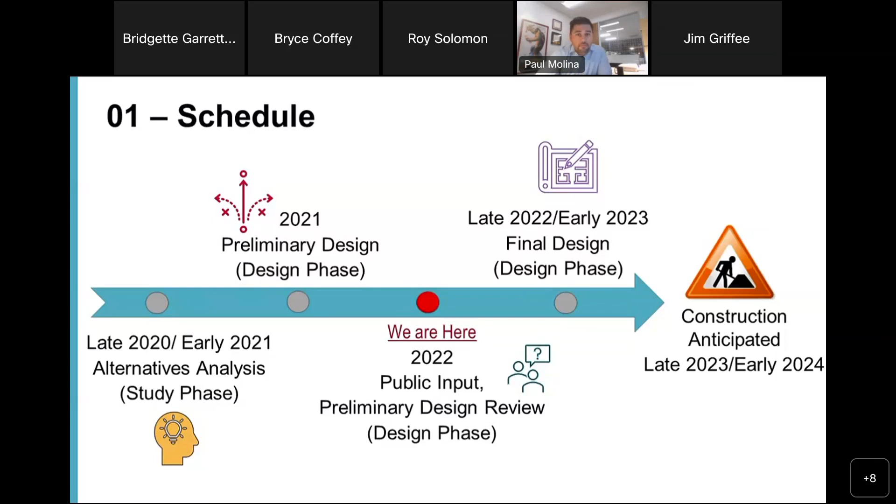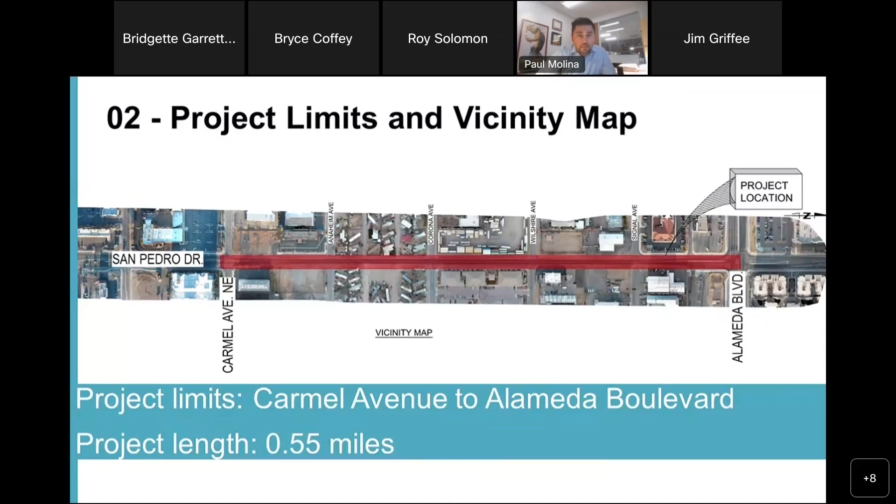So the overall project description and the corridor improvements that we're proposing for this project include full depth roadway reconstruction, new sidewalk, reconstruction of existing curb ramps and drive pads, modification to the existing storm drain infrastructure, as well as new storm drain infrastructure, new lighting, ADA, and PROWAG improvements.

We also did several considerations for pedestrian and bicyclist access improvements. These improvements include ADA PROWAG compliant sidewalk, drive pads, and curb ramps. Improvements also included buffered bike lanes where feasible, as well as bike lanes throughout the corridor, new lighting, signing and striping for both pedestrians and bicyclists.

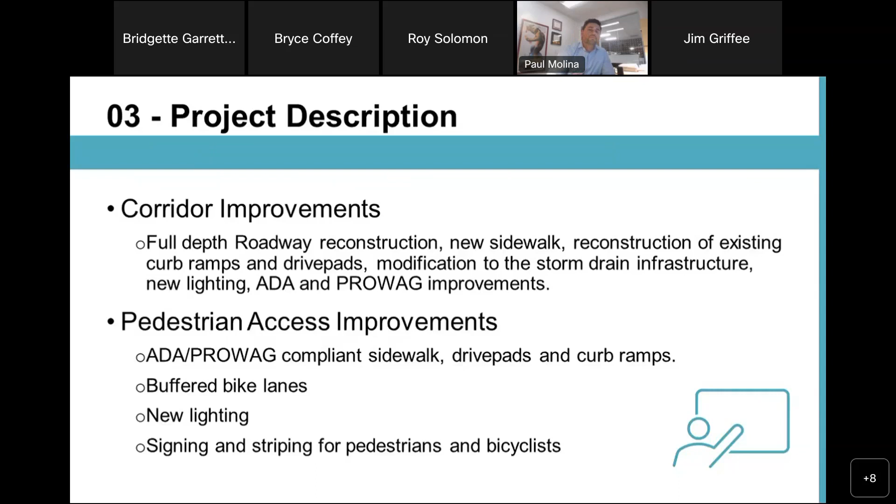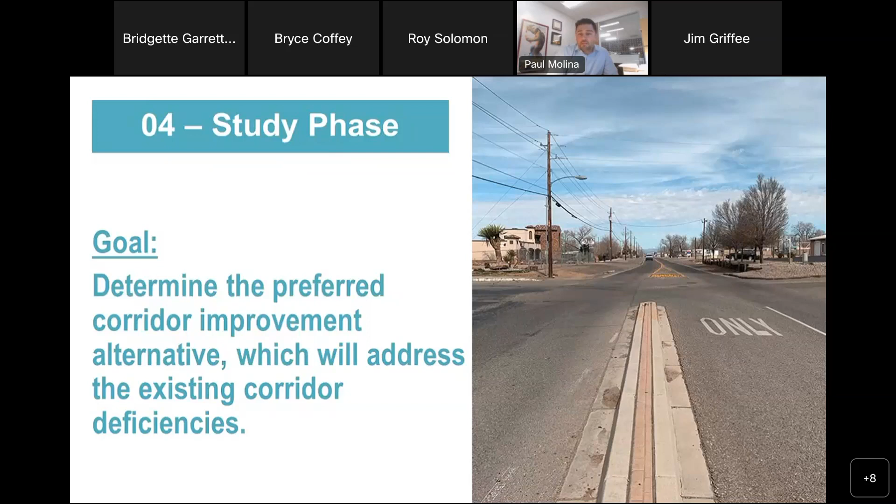So as I previously mentioned, this project went through a study phase late 2020 and through the beginning of this year. The goal of the study phase was to determine a preferred corridor improvement alternative, which addresses the existing corridor deficiencies. This includes deficiencies for both the transit, vehicular, and pedestrian and bicyclist use of the corridor.

So the primary deficiencies identified during the study phase were primarily the following. The existing San Pedro Drive corridor deficiencies include multimodal safety concerns, those being bicyclists using the roadway that vehicles are using, pedestrians traveling through the roadway, etc. There was non-compliant ADA and PROWAG infrastructure throughout the corridor as well.

There are a few small swaths of sidewalk out there right now. Many of those swaths of sidewalk are not ADA PROWAG compliant. Additionally, there are a lot of areas that don't have any sidewalk at all, so pedestrians are forced to use the roadway or walk through unpaved areas in order to get from A to B. The current layout has no bike lanes, and as I mentioned, had drainage deficiencies.

There is existing drainage infrastructure through part of the corridor, however, not through the entire segment. So we are improving the existing drainage infrastructure where feasible, as well as adding some new drainage infrastructure throughout. As I mentioned before, there's also some lighting deficiencies as well.

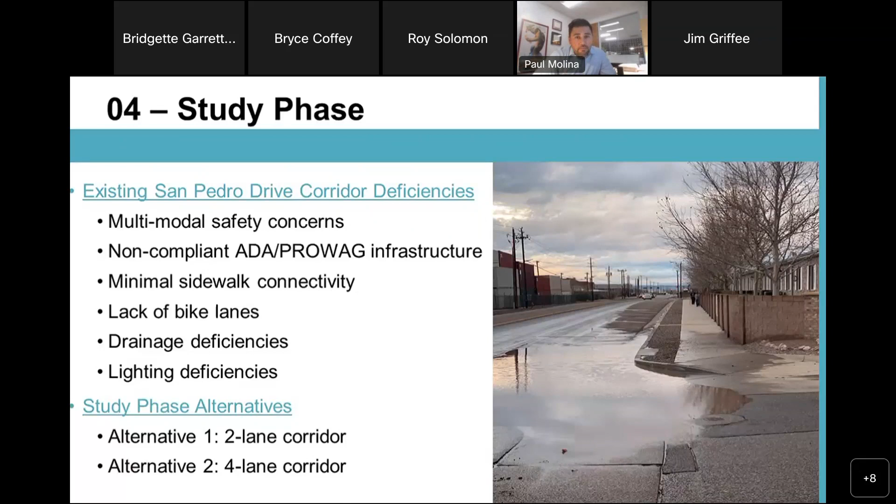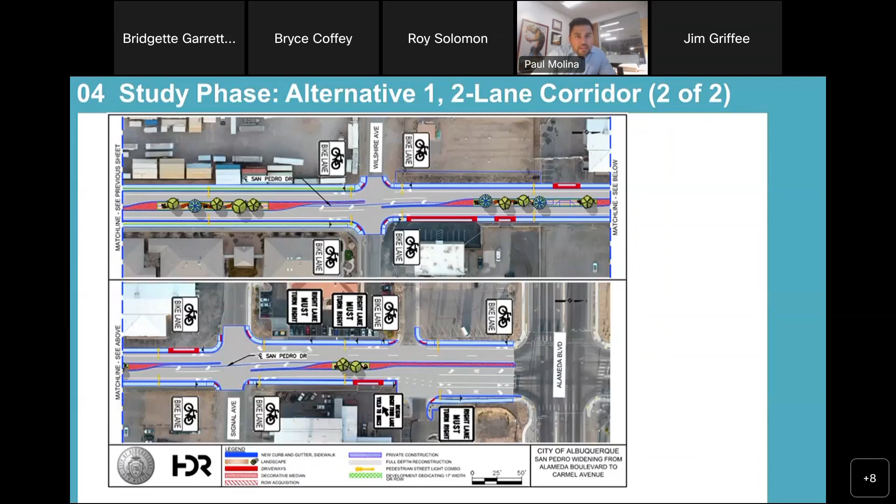Next couple of slides are going to be the 4-lane corridor. As I mentioned, the 4-lane corridor actually provides 2 lanes in each direction for a combined total of 4 lanes. In lieu of a raised median due to space limitations, a 2-way left turn is provided through the center. Like the 2-lane alternative, this one starts at Carmel Avenue, spans north, and travels to Alameda Boulevard.

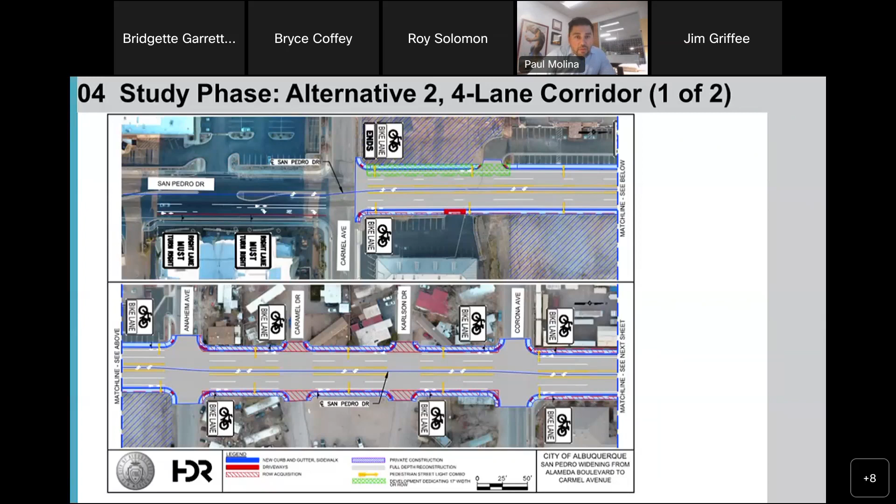Now I'm going to quickly run through a summary of what the study phase results yielded. For alternative 1, the 2-lane corridor, there were various pros. First of all, it was a smaller footprint. It required less right-of-way or less acquisition of property outside of the city right-of-way. We also did a traffic analysis during that time, and the 2-lane corridor showed a significant crash reduction when compared to the 4-lane corridor due to the raised median, which separated traffic from northbound and southbound.

The alternative 1, 2-lane corridor also provided less demand on storm drain systems - that being there not being as much asphalt or pavement surface draining to the storm drain system. Due to not having additional vehicular traffic lanes, it provides space for some bike lanes, some of which include bike lane buffers. It also provides space for some future landscaping, and overall, alternative one, the 2-lane corridor, had a lower overall cost.

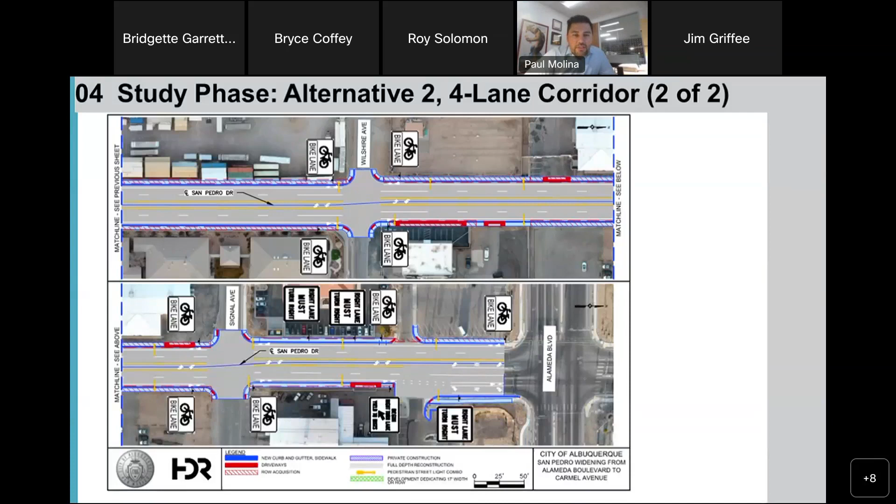I'm going to back up just one slide right here. You can see these shaded red, or hashed red, areas are actually the area for the sidewalk, which would require an actual right-of-way acquisition. In other words, we would have to extend outside the existing footprint in order to make this happen. There was a smaller crash reduction, that being because there is no raised median going through there, and then there's increased demand on storm drain systems and no room for bike lane buffers.

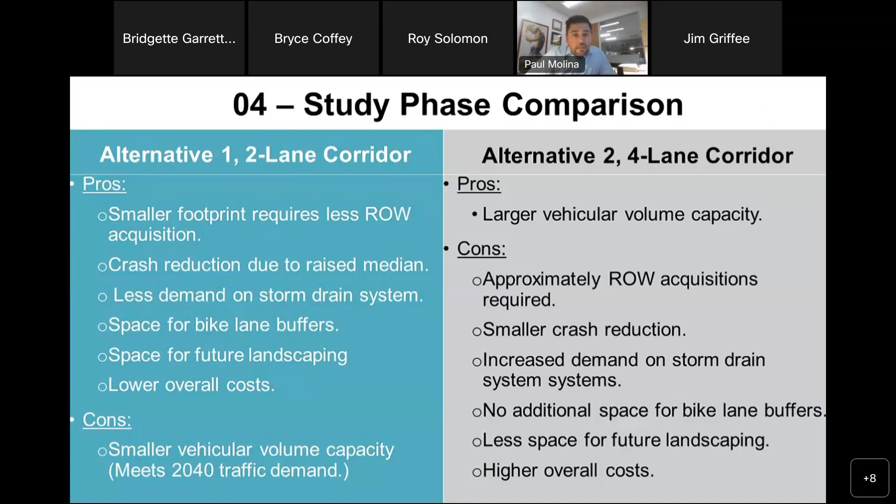Having said all that, the preferred alternative being moved forward into the design phase was the 2-lane corridor, alternative one. It required less right-of-way, greater safety, greater crash reduction ratio, smaller demand on storm drain infrastructure, additional space for beautification, and it had an overall lower cost. It also had wider bike lanes and the ability to provide bike lane buffers at certain locations.

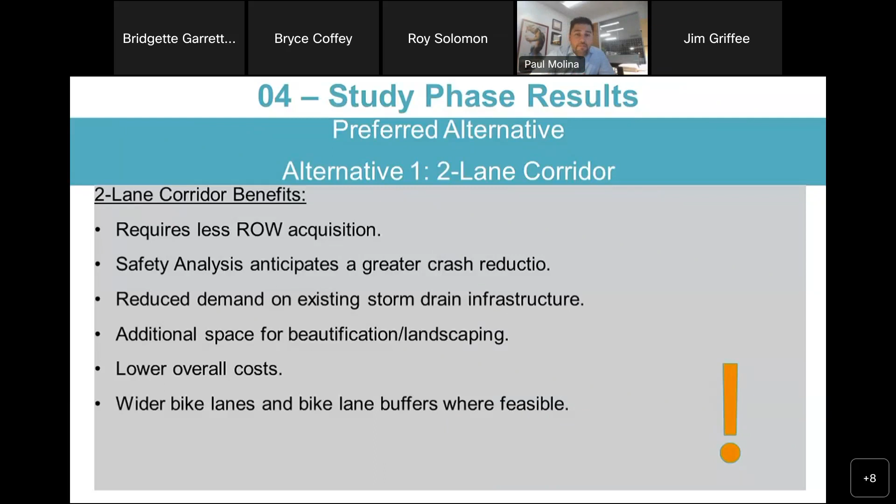So here we are, we get to the design phase, which is the current phase we are in now. The goal of the design phase is to take what we learned from the study phase and actually get it into design. The typical section for the design phase is two 10-foot driving lanes, one northbound, one southbound, with a 14-foot raised median separating the two.

We also have 5-foot bike lanes throughout the corridor, and 0 to 3 foot buffered bike lanes where feasible. This corridor did not have a constant right-of-way width traveling through it, so some areas were wide enough to provide buffered bike lanes, while some areas were too narrow to provide both a bike lane and a buffer. So we did our best.

As a biker, I always preferred to have a little more space with a buffer, so we definitely implemented them where we could.

The new design also has new sidewalk with ADA PROWAG compliant pedestrian infrastructure, including continuous sidewalk throughout the corridor. Roadway lighting will also extend throughout the corridor, and storm drain infrastructure improvements will extend through the corridor. That means sections that did not previously have storm drain inlets and underground conveyance will now have that infrastructure, as well as the proposed roadway topography being rebuilt in order to channel flows to inlets in lieu of ponding in intersections or being diverted into adjacent properties.